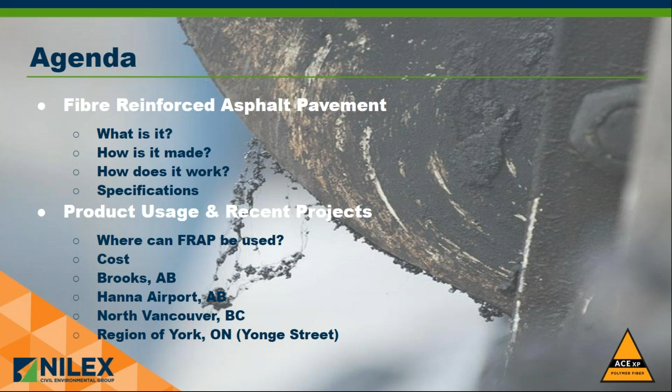Before we go any further, I'd like to acknowledge and thank our manufacturing partner, Surface Tech. They're the ones who developed this technology, so we'd like to thank them for helping bring this to Canada.

So what is fiber reinforced asphalt pavement? Let's look at the key differences between conventional asphalt and fiber reinforced asphalt pavement, or FRAP. Standard asphalt is basically rock and binder, where FRAP includes aramid fibers with micro roots which grab and anchor into the asphalt cement, or the binder. Standard asphalt in the field has low tensile strength, where FRAP changes its behavior into a fibrous tensile solid. It's a three-dimensional reinforcement.

Standard asphalt is temperature susceptible, meaning that during hot days and cold days it wants to shrink. In hot days it wants to get soft and under loading, start to move or rut, and during cold days it wants to shrink and start to crack. Whereas on the other hand, FRAP has high strength, which basically resists that movement and that cracking, so it improves the performance of the pavement.

Standard asphalt has a non-uniform chemical bond between asphalt and rock. However, the aramid fibers add a certain consistent mechanical reinforcement to that mix, helping to increase the bond. And eventually, over time, asphalt cement will oxidize and start to break down. The presence of these fibers can help resist some of that breakdown and still improve the performance as the mix gets stiffer, leading to potential cracking.

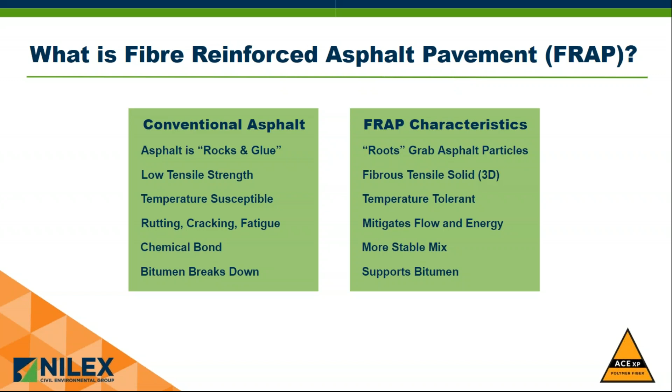In trying to increase the structural capacity and extend the service life of an asphalt pavement, while desirable, it is difficult to achieve, when you consider all the external stresses acting on the pavement. You've got environmental stresses, top-down stresses, and bottom-up stresses. Any flexible pavement is only as good as the aggregate base, so in order to maximize the performance of fiber reinforced asphalt pavement, this is reliant entirely upon having a good base.

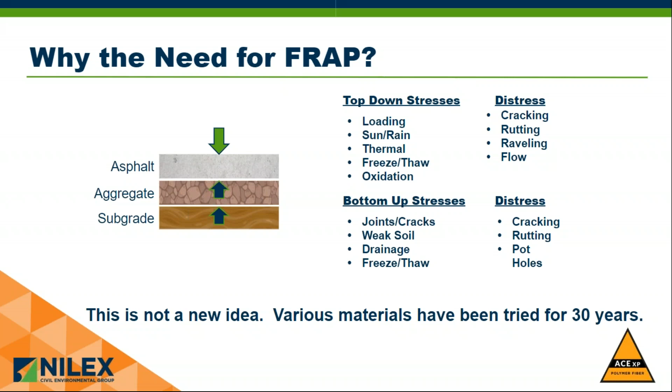The idea of adding fibers to asphalt pavement is not a new idea. It's been tried for over 30 years. The material that started to come out as very beneficial for this is a material called aramid fiber. So what is aramid fiber?

Aramid fiber is a synthetic high-performance fiber. While the term aramid may not be familiar to everyone, many of you are familiar with at least one form of aramid fiber. There are a number of manufacturers across the globe that produce aramid fiber. One of the companies, DuPont, their trademark aramid fiber is Kevlar. The material itself, as Kevlar, has been used in a number of industries to replace and supplement the performance of many products. So it's a new, interesting, high-performing material, and because of its characteristics, it's uniquely fitted towards working with asphalt cement pavements.

The fiber itself has 5 times the tensile strength of steel. But because it has a very low strain, it means that it's a high modulus material, which makes it very effective at reinforcing asphalt pavements. Aside from the tensile strength, one of the biggest factors that helps aramid work within an asphalt pavement is its extremely high melting temperature. The melting temperature at 425 degrees is well in excess of the typical temperature ranges in which we're making asphalt pavements, so there is no possibility of the fiber melting during the mixing process. That combination of high strength, low strain, and temperature resistance makes it a very effective reinforcement for asphalt pavements.

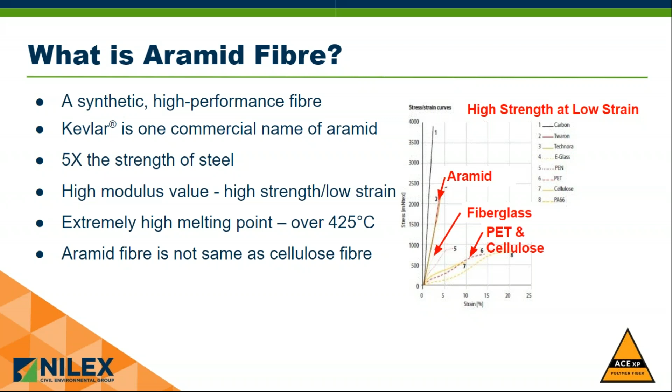So how do the aramid fibers work within an asphalt pavement? The key to the performance of the fiber, not just with the strength and strain relationship, but it's actually the nature of the fiber itself. The fiber is not a smooth, straight fiber, like fiberglass. The key to the aramid is the entire structure has lots of little fibrils along the shaft of the fiber, and these are free to basically grab onto anything they're in contact with. A lot of times they'll be in contact with the aggregate particles, the large and the small ones. The fibers are going to wind up grabbing onto anything, but they also have the ability with those micro roots to actually bind into the asphalt binder if that's all they're in contact with.

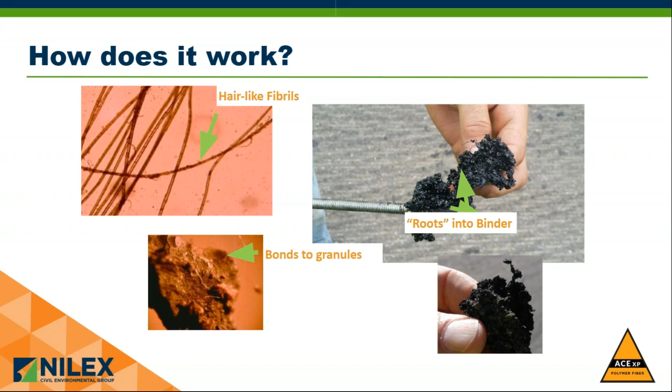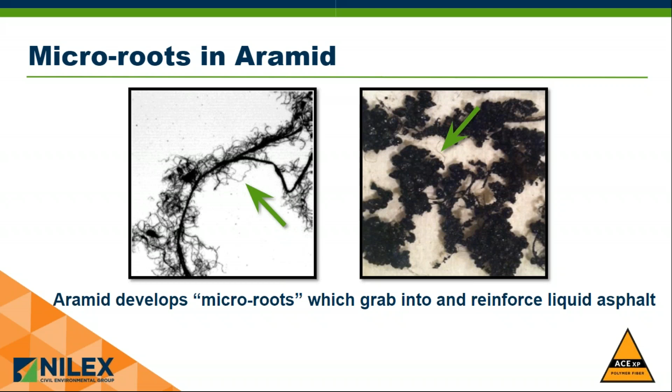To see what that structure looks like under a scanning electron microscope, the image on the left shows what these microroots look like. Now just imagine that in contact with your aggregates and with your asphalt cement. This is going to grab onto everything that it can. The picture on the right is basically showing what the material can look like. The image on the left is untreated aramid fibers, taken from some lab work that was done. The end product, after mixing and delivering to the site, is shown in the image on the right.

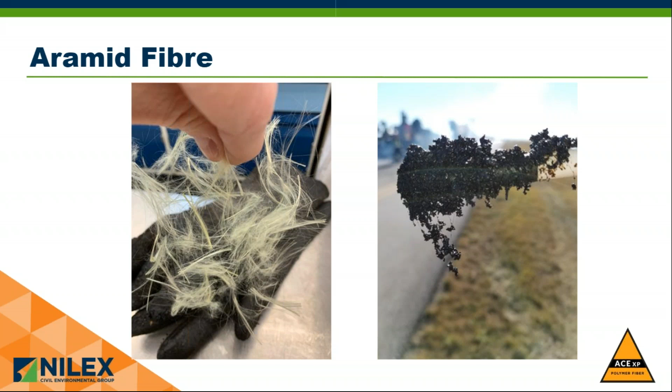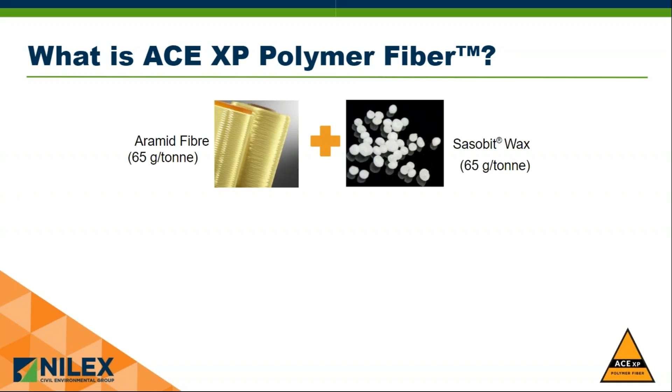Several spools of aramid fiber are spun together to create these bundles. Those little yellow sticks, if you will, are actually bundles, but each one of those bundles has over 10,000 fibers within it. The aramid melts at 425 degrees, so it's nowhere near the manufacturing temperature of the asphalt, but the Sasobit wax melts at 77 degrees Celsius. So as these fibers are introduced to the asphalt plant, the wax is melting, releasing the fibers into the dry aggregate as it's mixed, creating this reinforcing material.

I mentioned that the aramid fibers are not the same as cellulose fibers. Aramid does not absorb binder. So by adding this to any asphalt mixture, we are not actually changing the job mix formula or requiring any additional asphalt cement within the mix.

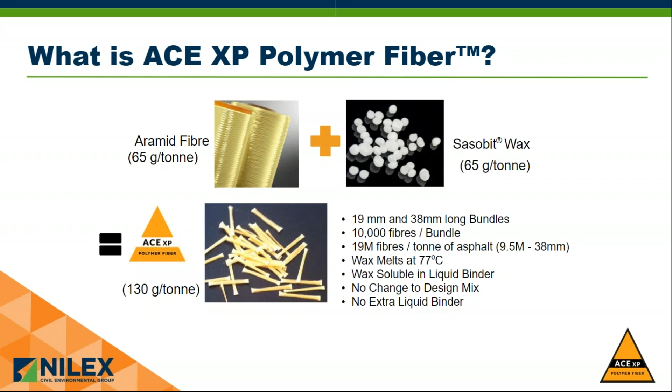So the fibers are available in two sizes. Why two sizes? Well, think long hair versus short hair. If you run your fingers through longer hair, you will have a greater interaction or snagging with the longer hair. So the increased length means greater resistance to the stresses imposed on it. Think along the lines of a bond development length in concrete.

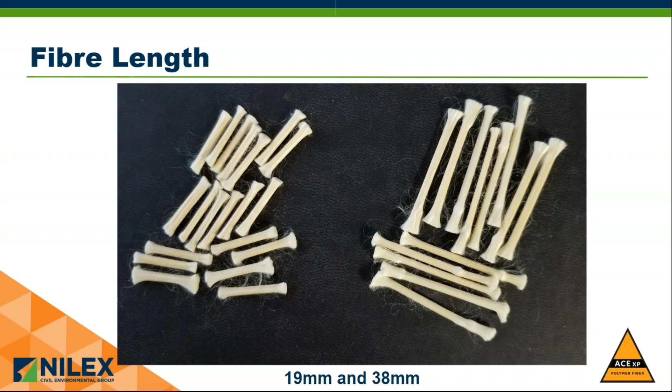You've got greater resistance, longer fibers fighting the external stresses on the asphalt. So these longer fibers give you slightly better performance than the shorter fibers, but there's no additional cost. So the longer fiber we're recommending because it's slightly better performance and no additional cost versus the shorter one. The shorter one is where the industry sort of started off, but the longer ones are proving slightly better, and for no additional cost, it makes a lot of sense.

So how does the longer fiber perform versus the shorter fiber? There's a lot of lab work that's been done in the United States, and what we're basically finding is that we get the better performance for the same price. The flexibility index testing shows almost a 37% increase over a control mixture with the longer fiber. Because you're increasing the flexibility index, it's suggesting that the longer fibers improve the cracking resistance of the asphalt pavement.

Flow number testing also shows a 37% increase over control mixtures, suggesting that the longer fibers improve rutting resistance of the asphalt. The 19 millimeter fibers also showed this increase, but it was only a 30% increase, not 37%. So hence a slight performance increase over the shorter fiber, but for no impact on the cost, it makes a lot of sense to go with the longer fibers.

We're still using the same mass of fibers. It's still that 65 grams per ton of aramid. It's still the same surface area. You just have half the number of fibers, but they're longer fibers.

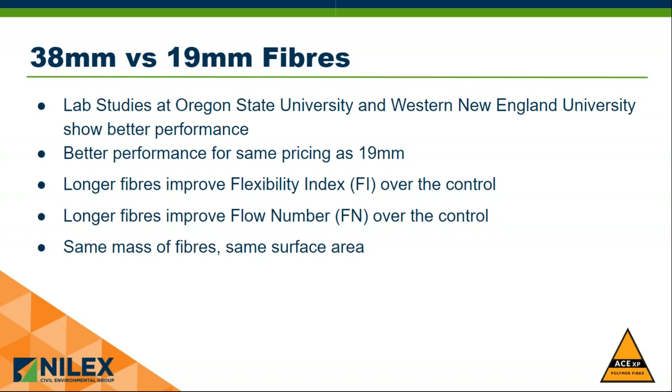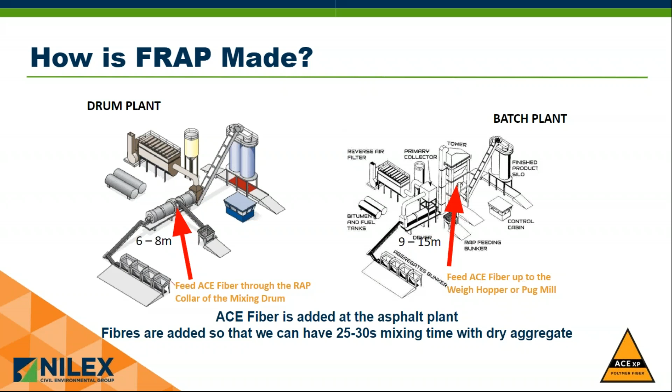So how do we make fiber reinforced asphalt pavement? What do we do with this ACE fiber product? Quite simple. Basically, we add it to any drum or batch plant, typically where you add in your RAP. We want mixing of the fiber with heated dry aggregate, and we're looking for 25 to 30 seconds mixing time prior to hitting it with your binder. So you're giving the material a good chance to melt and mix with the aggregate and bind with the aggregate before you add the asphalt cement to the mix.

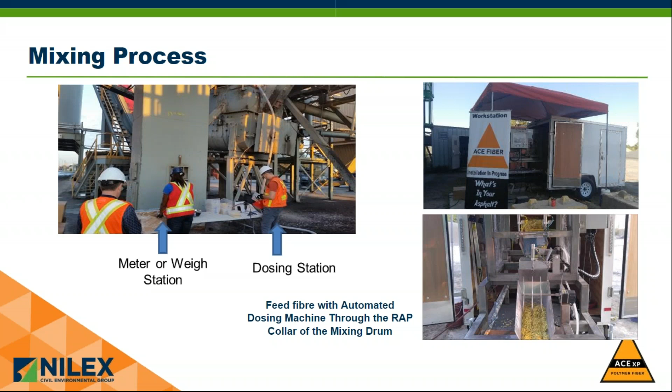Depending on the size of the project and your asphalt production schedule—is it a one-day project, or a bit over a number of days—the fibers can be added using either a manual system or an automated dosing system. Typically we are just blowing these fibers through the RAP collar in most plants, or into the pug mill on a batch plant, and we're getting good mixture with the material.

So by adding these fibers to your mix, it improves the performance of your mix. But what does that mean? Adding aramid fiber to a good mix will improve the performance of the pavement, but it's not going to modify the job mix formula.

It'll improve the cracking, rutting, and fatigue resistance of the mixture. It will not stop the asphalt from cracking, but it will take longer for the cracks to appear, and when the cracks do appear, they're going to be a much smaller size. So when you think about it, especially with a reflective crack going from the bottom up, the entire layer of pavement is now reinforced with the fibers. So the crack has to work its way through an entire reinforced matrix, and when it does daylight, it's not going to be as wide as it would be in an unreinforced material.

Ultimately, the performance of the pavement will depend on the condition of your aggregate base. You can have a great pavement, but if you've got a lousy aggregate base, you're still going to have a lousy pavement. This might be a really good quality Band-Aid, but ultimately you haven't fixed your problem. Your problem is still base related.

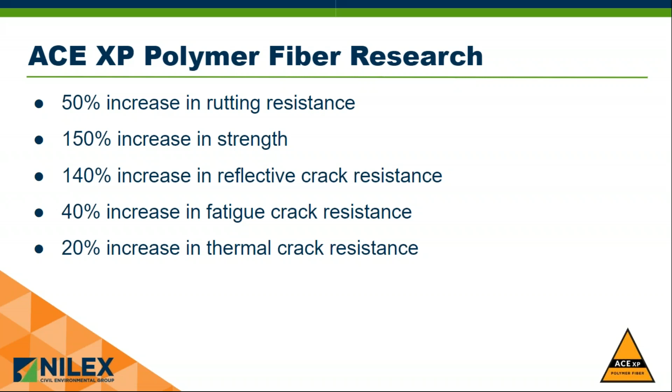Now, how do we come up with those numbers? As a new technology, the testing of the fiber reinforced asphalt pavement is an ongoing project. Much of our current testing program is focused on material characterization for use with NCHRP pavement design methods.

Much of the research testing has been done in the U.S., but as owners in Canada start to use FRAP, Canadian consultants are starting to work with this material in their labs. Some of the Canadian labs that have done various forms of testing with the fiber, whether in-depth mix design or simple QA testing, include companies like SNC Lavalin, the City of Edmonton, Golder Associates, and Englobe, just to name a few.

So how do we quantify the benefits of adding this material to your mix? We're going to improve the rutting and cracking resistance of the material, but one of the takeaways from all the testing we've done is to look at the effect of using a reinforced pavement versus an unreinforced pavement on a typical pavement design.

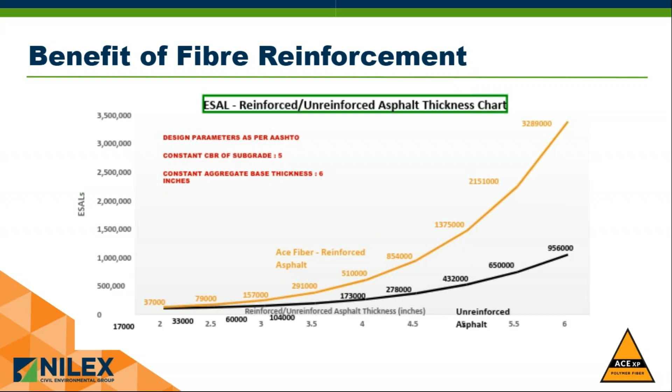So I've spoken a little bit about what this material is, how we make it, and why we do this. But how do we get this used into contracts? How do we specify this in our projects if we really want to use this? It's an engineered material, so basically we can build a generic fiber reinforced asphalt concrete specification, focusing on the properties of the aramid dosage, the fiber length, and how it's going to be delivered.

So 65 grams per ton, that is what we're focusing on. That's the active ingredient, if you will, the aramid fiber. The length of the fiber is important. Better performance with a longer fiber.

Continuous stream of fiber: if we feed in the fiber on a constant stream-like feed, we're adding fibers entirely as you make the mix. We're not dumping this all in at once, so we're not pulsing it, if you will. This is a continuous stream. As you add in the aggregate and the binder, we're adding the fibers just like you would that.

You're paying extra for this material, so it makes sense to ask for some verification that it's in there. Daily mixing logs should be a requirement.

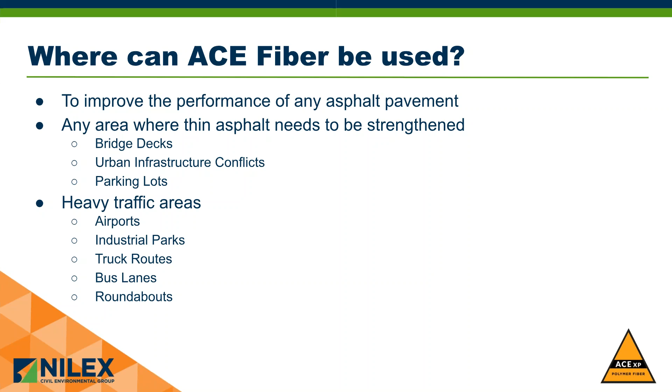I also wanted to mention quickly the possibility of using this in a remote site, where materials may not be readily available, or where you're bringing in a portable asphalt plant to do the work and then moving it back out again. If you can extend the life by a couple of years and not have to bring that asphalt plant back again, that might be a good opportunity for ACE Fiber as well.

Okay, so ACE Fiber cost. Let's talk about that for a minute. We are currently using about a $15 a ton premium for the ACE Fiber, and that includes the ACE Fiber material, the dosing, and the QA/QC documentation that Michael mentioned. And that price is a contractor price.

You could also look at it in an overlay sense. So a 50 millimeter overlay will work out to less than about $2 per square meter, to give you a sense in that manner. And a lane width kilometer, so 3.75 meters wide, a kilometer long, would cost you about $7,500, to give you a sense in kilometer range.

One box of ACE Fiber will cover just over 1,100 square meters of 50 millimeter overlay. The boxes come in a 40-pound box and treat about 138 tons per box.

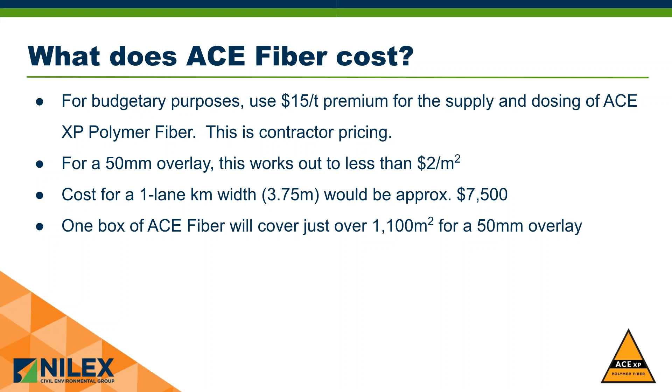Okay, so let's talk about the dollars, the benefits we talked about, the extended service life and whatnot. What we want to do here, of course, is extend the service life. We want to increase the years to the next rehab or the next overlay. But let's put it into dollars and cents.

If you're able to hold off on that overlay by a number of years, every square meter of a 50 millimeter overlay that you save doing is new spend, and that new spend can range anywhere from $15 to $27 a square meter. That, of course, varies across the country, across the regions, and due to materials and availability of asphalt plants, that type of thing. But that is your range that you can spend elsewhere.

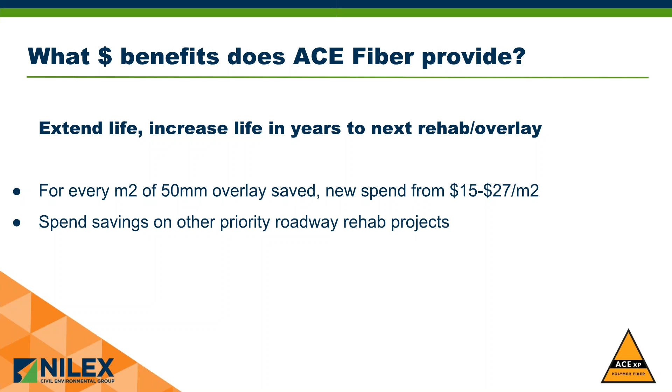So, again, if you have other priority roadway rehab projects, that's a good place to spend that money. Perhaps there are more urgent repairs or emergency repairs that need to be done, and that's where that $15 to $27 a square meter can be used.

So who have we been working with in 2018? We've got over 20 installations across Canada in 2018. We've been across the prairies through Alberta, BC, into Manitoba, Ontario, Saskatchewan, and we also have some work done in the Northwest Territories.

The reinforced asphalt pavements have been used by MTOs, airport authorities, municipalities, private owners. A lot of those people are developers and asset management companies as well that own asphalt.

Of course, we use it on major highways, taxiways and runways, municipal roads and parking lots. And this material can be used, again, as a surface course as well as a binder course down below as well.

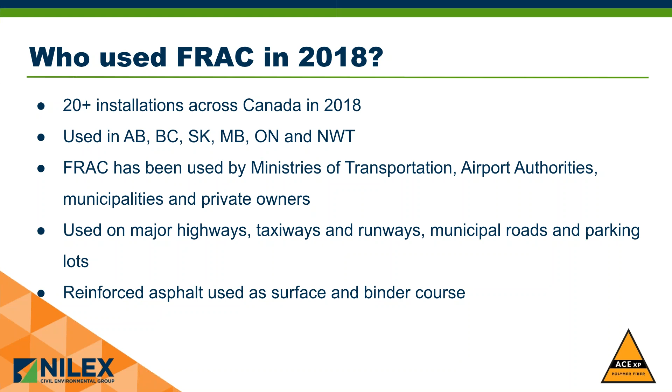So with that, I want to take you through a few jobs that we've accomplished in the last year. This one is actually back from 2017 for the District of North Vancouver. I brought this one up because I was out there last week and met with the district, and I asked, could we go look at the pavement? And he said, well, there's really nothing to see - no cracking, no rutting, nothing going on there. So they did say it was performing well, but that was done in October 2017.

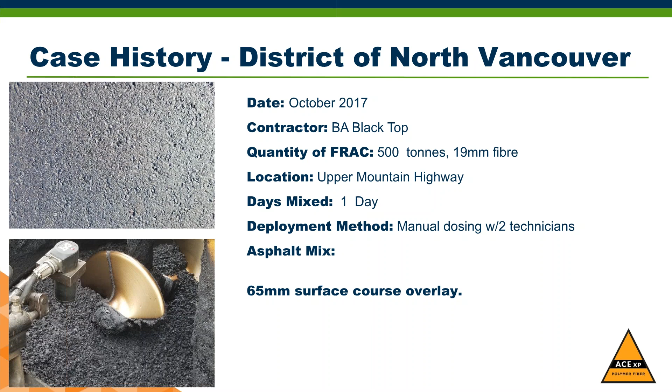Moving on to Leduc, this project in Alberta last year in July. Carmacks was the producer and installer of the material. There were 4 separate sites, and of these sites, there was about 12,000 tons of material used in total. There was 38 millimeter fiber being used.

This was dosed both by the automated machine, and then near the end of the project we had to ship it off to another project in Saskatchewan, so we finished it with manual dosing. It was Alberta Des 1 12.5 millimeter mix with about 20% RAP. 3 of the projects were overlays, and 1 was a full depth asphalt.

Another thing that Leduc County wanted to do, as this was a good trial for them, is they went out and did some extra testing. So they had their consultant hire a testing lab within the city, and they tested the FRAC versus the control. So that raw data is now back, but we'll reserve comments until the full report is released, which should be soon.

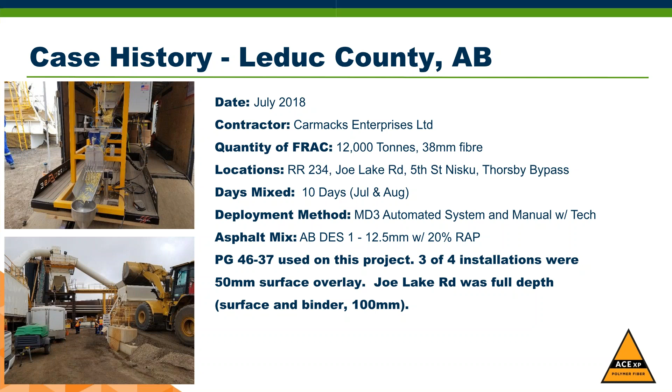Moving on to Southern Alberta, the City of Brooks. This was done by Brooks Asphalt. It was about 11,000 tons of 38 millimeter fiber. The project location was Cassils Road. It was about 12 days of mixing. They had some rain in between this project, so it extended out to about 16 days total.

But it was the MD3 automated dosing machine again, and on the large projects we try to use that machine because you could be standing there dosing for a long time with these larger quantities. So this was a Type 1, Type 2 City of Brooks mix. It was a 75 millimeter overlay.

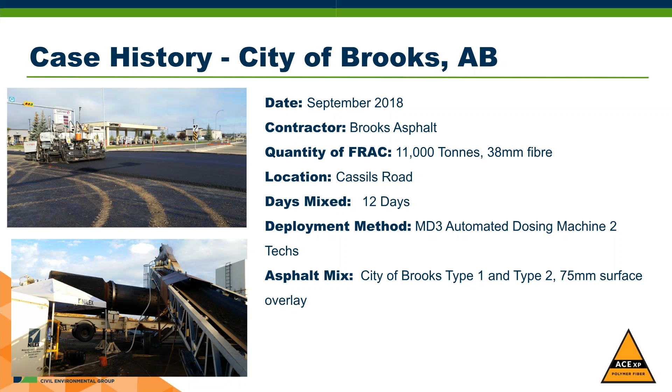Moving over to Ontario in September, the Region of York in Ontario - D. Crupi and Sons were the installer of the materials. About a 9,000 ton project, 38 millimeter fiber used on this Yonge Street project. This one was actually done at night, so there were 5 nights of dosing. It was hand dosed, and as I mentioned, our equipment was busy at the time, so they had to hand dose that - 5 long nights of dosing. This was a 19 millimeter Superpave mix with a 70-28 oil.

Again, all night paving with this one, and they used the material transfer or shuttle buggy for the installation of this material.

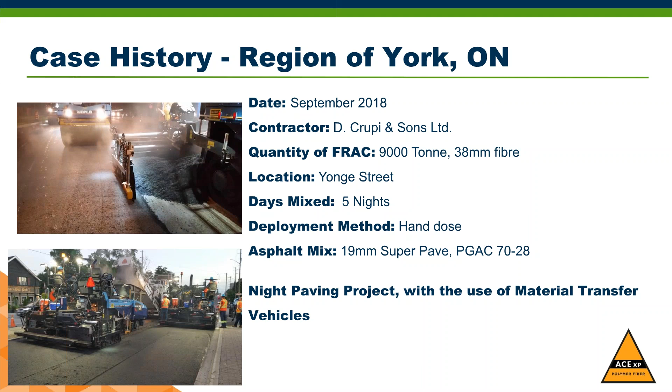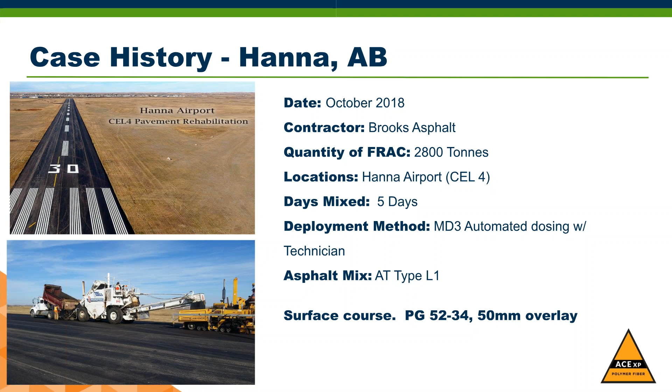It was an AT Type L1 asphalt mix. It was a 52-34. It was a 50 millimeter overlay. And again, they were using shuttle buggy here too, or material transfer vehicle as well.

So it's been impressive how one project can lead to another. As more parties get interested in the material and hear about it, we're just doing more and more work in that manner.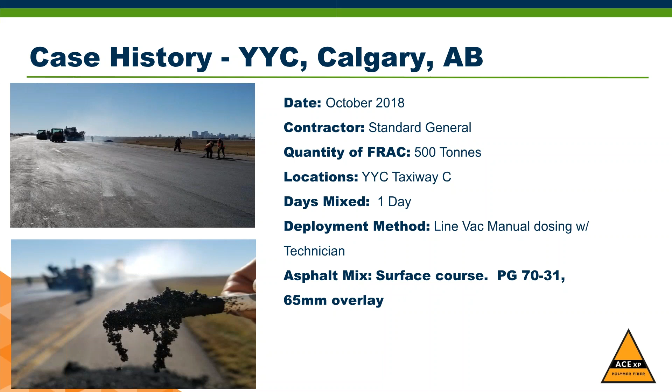All right, I want to give you a little more in-depth understanding of who's using this material and whereabouts we've been in 2018. So not a full case study by any means, but I want to give you the names of the proponents that have been using the material.

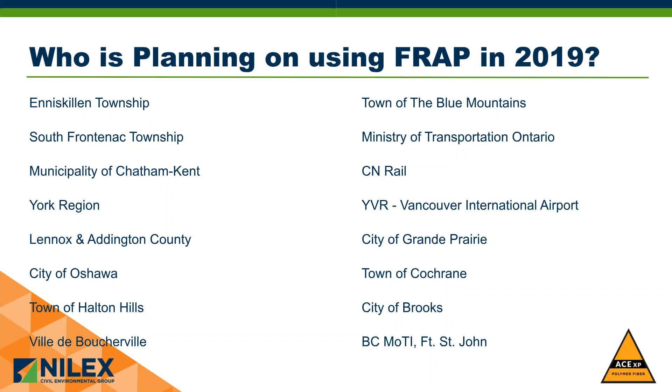And again, after this, if there are any potential applications you may have, we'd be happy to discuss them with you. So at that, I will say thank you very much for your time and attention, and I'll hand it back to Ed for any questions that may have come up.